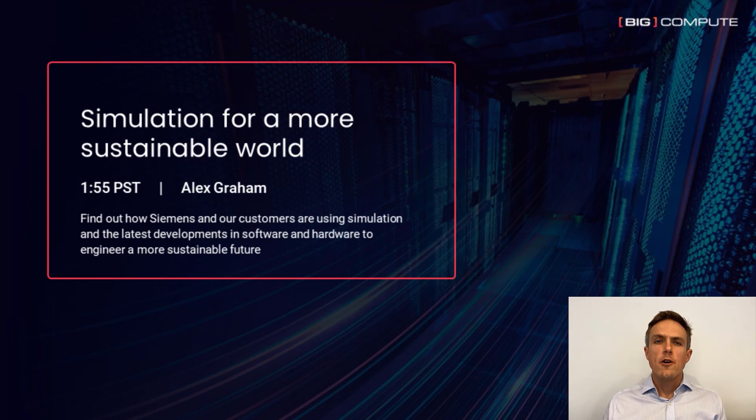Hello and welcome. I'd like to start off by taking you back just over 300 years to when Thomas Savery invented the first machine that could reliably, perhaps not very efficiently, convert the energy stored in fossil fuels into useful kinetic energy. This device heralded the start of the first industrial revolution, and in the beginning it could only convert about 1% of the available energy into useful motive power.

Since then we've come a very long way. All of the refinements and developments that followed from this initial invention have given rise to one of the biggest transformations in the quality of life that our species has ever seen.

It also led to a rapid rise in population and a huge demand for cheap energy. Today the population of the world is around 8 billion, and the UN predicts that by 2056 that number will be 10 billion. Cheap energy is critical to improving and developing quality of life the world over.

So we all know there's a huge challenge ahead of us as a species. We need new technologies, breakthroughs, a lot of innovation. But also the way we value and use energy needs to change, and a big part of that is making sure that the energy we do use is used as purposely and efficiently as possible. That's what I'd like to talk to you about today.

My name is Alex Graham from Siemens Digital Industry Software. Over the past 10 years or so, I've been working with lots of our simulation products and our customers across a whole range of industries and applications. Today, I'm excited to share with you some examples of what Siemens and our customers have been doing to improve the way that we work and improve the way that we consume energy today.

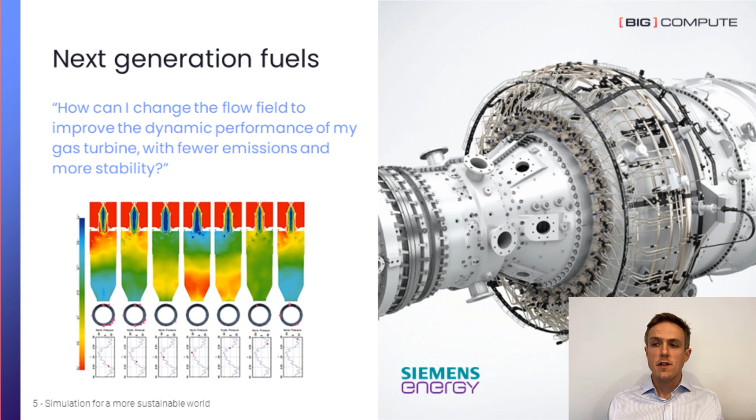They went on to comment that actually the thing that's been holding them back is computational power, and it's only over the last 2 to 5 years that this has really been possible. Luckily, there are some big leaps being made in solver and HPC technology, and we'll get onto that later.

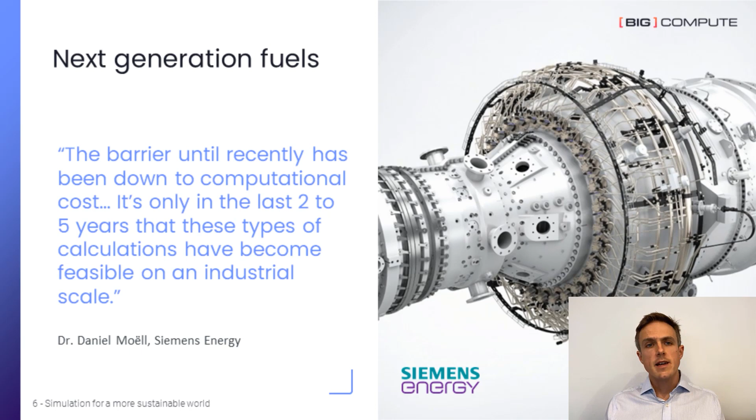The next example is all about getting that extra few percent of performance out of an existing design using the latest simulation and generative design techniques. EDAG, one of our customers in the automotive industry, was working on an electric vehicle battery pack cooling circuit. They worked with us to optimize this component - a flow splitter and return line packed very closely together, circled on the slide. The packaging constraints really limit what this device could possibly look like.

But still, using a simulation-driven design approach, we were able to make significant gains: almost 50% change in pressure drop and a 7% improvement in mass flow rate through the cooling channels. That equates to an improvement in cooling efficiency and an energy saving in terms of the effort needed to push the fluid through the system.

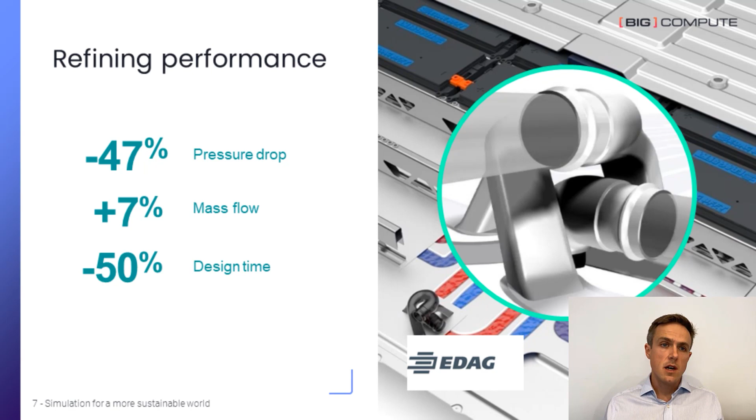Meanwhile, the design time actually falls because you don't need to design, test, refine and go through that cycle. We go directly to a design which satisfies the needs of the flow itself. This is shown nicely in this video.

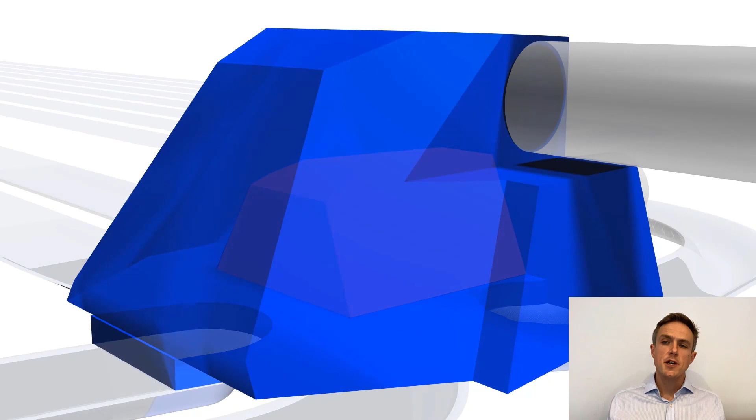As we zoom in on the component, what we see is a design that was created by a human, which is pretty good. Then we see a bounding box placed on that geometry - that's the packaging constraint. Then the algorithm simply removes any material that's not helping it achieve its target, and we naturally end up with quite an organic shape.

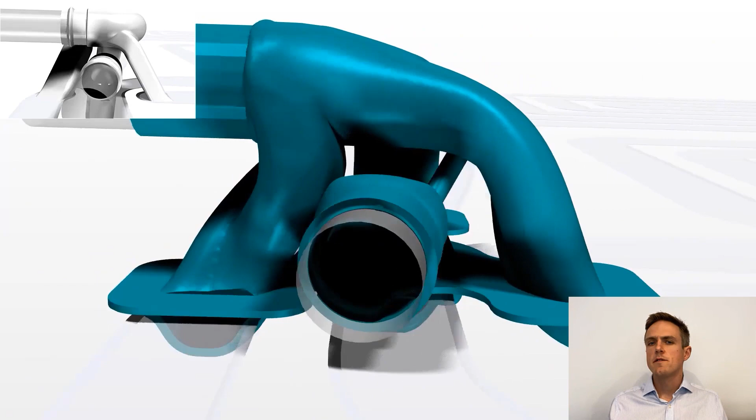As you can see, it's not far off what the original designer came up with - it's almost as if the pipes have been joined in a different order. But this is the way the flow prefers to go, and it results in a more efficient design. It's a great example of how simulation is now enabling us to push the design of even a simple component and find more of these small efficiency gains, which all add up.

The really interesting and exciting use cases for simulation all have one thing in common: they're all possible due to the relatively huge computational resources we now have access to. And yes, that compute is expensive, both in monetary terms and environmental impact. So we need to figure out ways to reduce that environmental impact, even as the compute itself is used to solve some of the big challenges facing us, make breakthroughs, and improve energy efficiency of the products.

Other things we can do to reduce the environmental impact of simulation are to improve solver technology and to improve HPC technology. We'll take a look at both of those things as well.

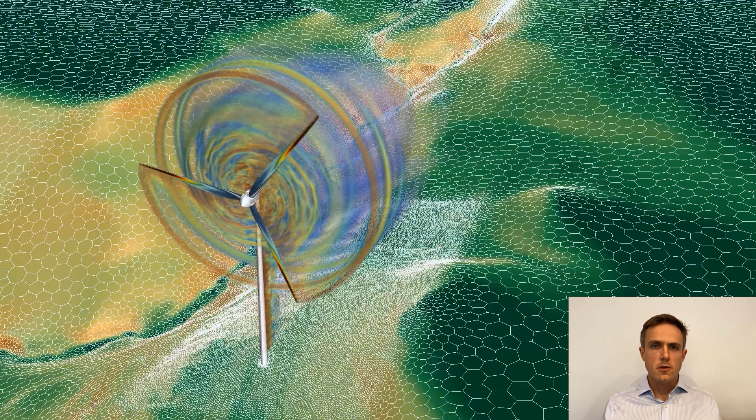Under the hood, it's a lot of number crunching. The volume containing the fluid has to be split into millions or billions of cells, and with each cell being directly connected to a number of neighbors as well as indirectly connected to the whole of the rest of the model, the solver has to work very gradually towards a solution where all of the cells and all of the flow is in equilibrium. It's even more complex in a simulation like this, where we're looking for the transient behavior of the flow. So that also has to be done at a number of points in time to build up a picture of how things change.

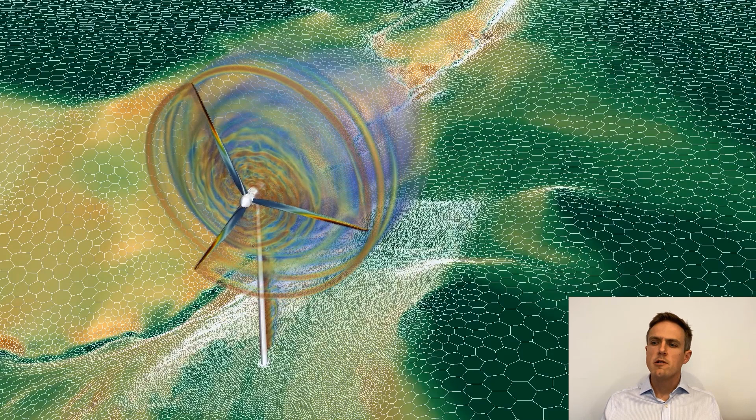So the mesh is actually what you see in the example on the screen right now. So if you imagine that whole volume is filled with a sort of honeycomb type structure, it can be honeycomb, it can be a sort of grid. But the mesh is not usually shown in a video like this, otherwise you wouldn't be able to see what the flow was doing. So what you're actually seeing there is the imprint of the mesh on the surface of the landscape where the wind turbine sits.

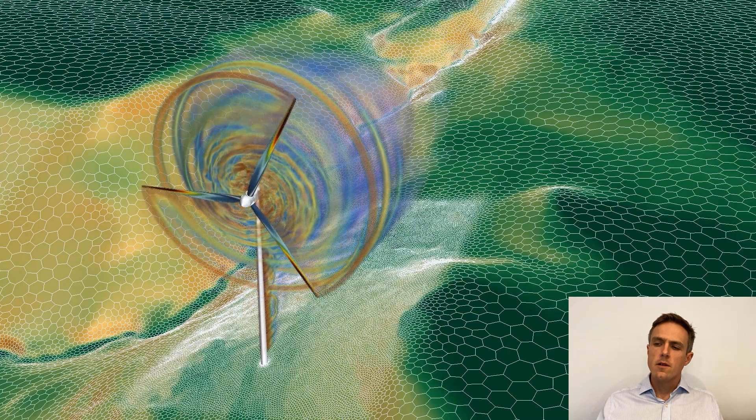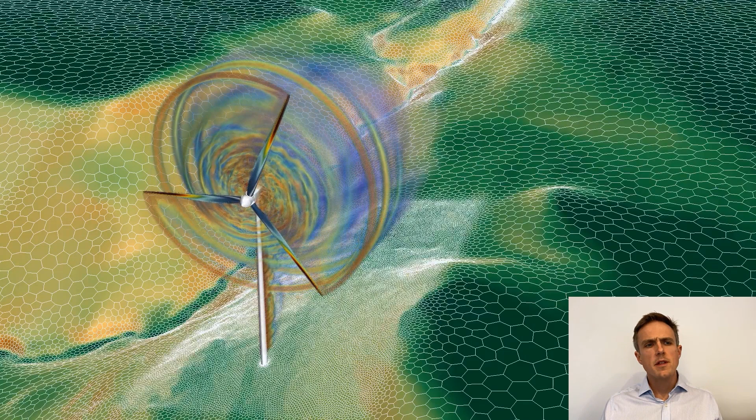But what you can see is that the resolution of the mesh is definitely changing there. So it's quite coarse on the outside, far away from the turbine, but then it's very fine where the turbine is. And that's just like pixels on a TV. So far away from the turbine, we're looking at like a dot matrix display, and close to the turbine, we're looking at sort of 4K resolution, because we want to be able to resolve what the flow is doing. So we need to have lots and lots of data points to do that. So in this case, you can see that the mesh has been refined close to the turbine in a fairly manual way. But this is actually something that we can change to make a big improvement in efficiency.

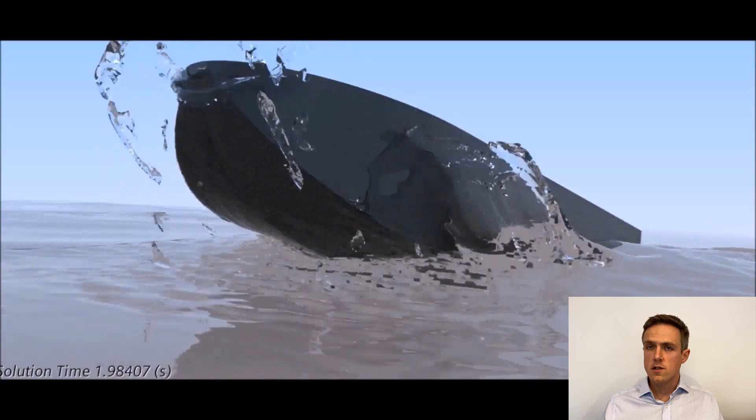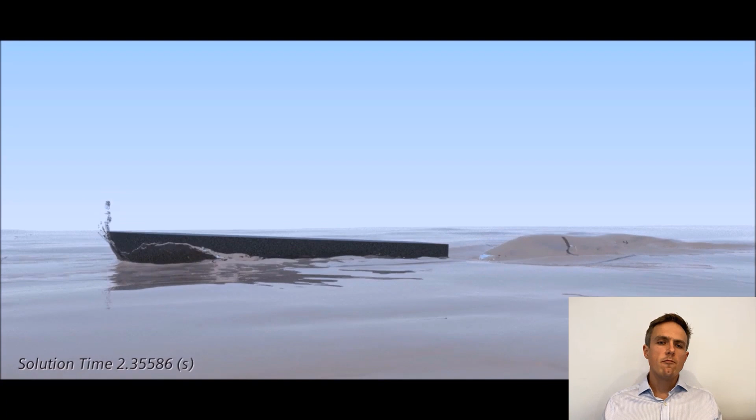So in this example, you're seeing a planing hull moving through waves. And in this model, the water flow and the air are both included in the simulation. And of course, there's a sharp interface between those two, which is the water surface. So the difficulty is that because the boat's moving through the waves, it's dipping up and down and the water's splashing and breaking up into droplets. We don't really know where it's going to be. And so to refine the mesh enough to be able to capture the water surface in all cases would inevitably be quite inefficient.

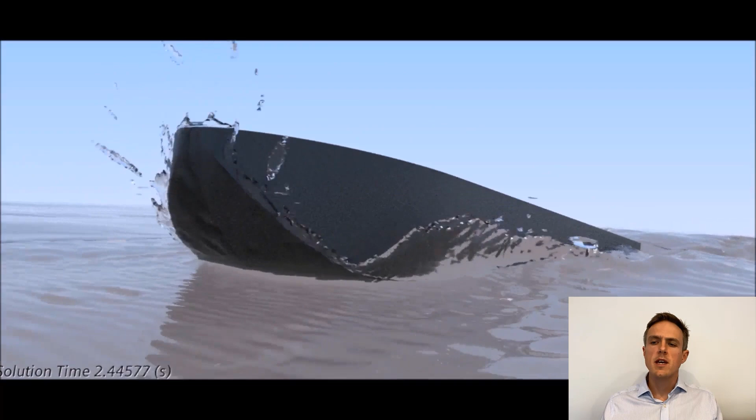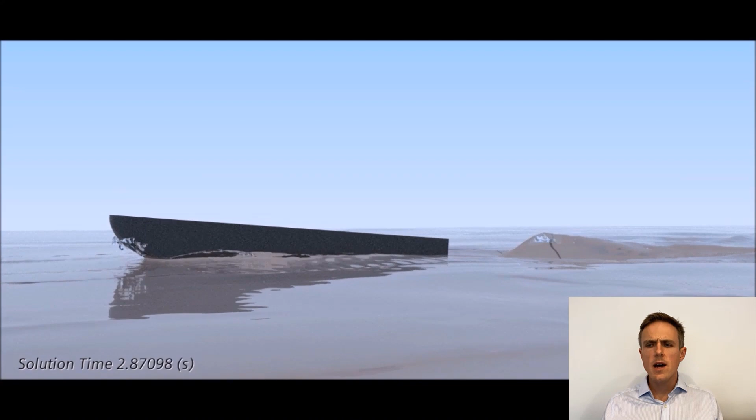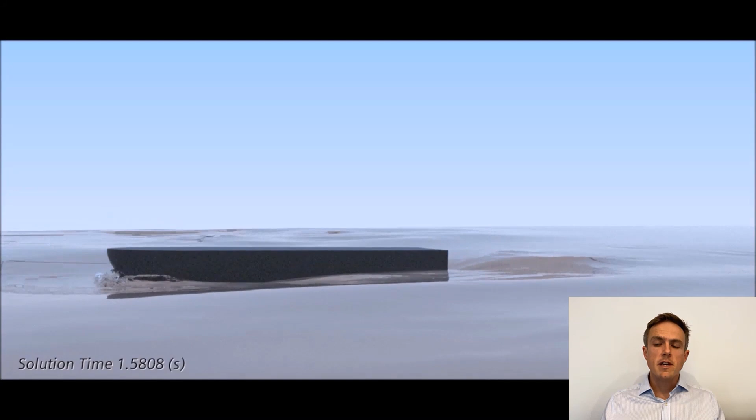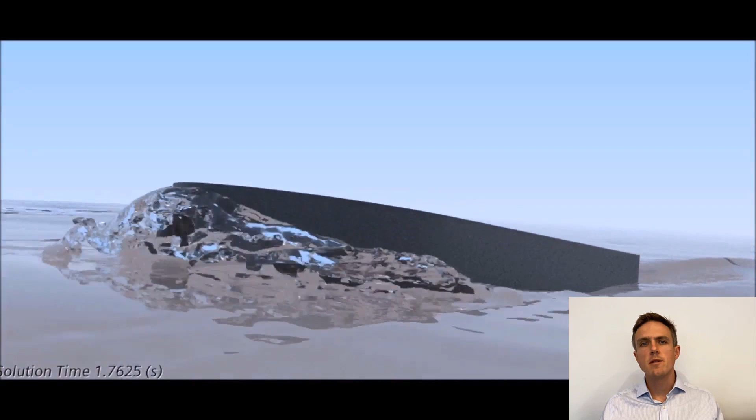So what we see happening here is an adaptive algorithm which is automatically refining the mesh where the water surface is. So it's adding and removing cells all the time. And this means that you can then run the model much, much faster, or you can run it in more detail at the same time. In this particular case, this is an industry standard benchmark case, and this actually gave a speed up of nearly 3 times just by implementing a different meshing algorithm. So adaptive mesh refinement is just one example of simulation technology which can really improve efficiency, let you do more and consume less power in the process.

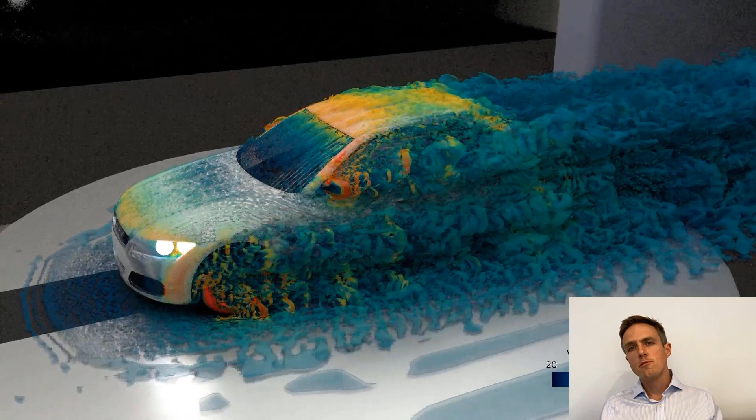So car aerodynamics is a field of ever-growing relevance as electrification continues to transform the industry. And aerodynamics is especially relevant for electric vehicles for 2 reasons. So the first is the obvious one. If you can improve the aerodynamic drag, then you can get more range from your battery. The second is that without the masking soundtrack of the engine, the occupants of the car are now going to start hearing much more noise from things like the side mirrors, the sunroofs, the HVAC systems, and the external aerodynamics.

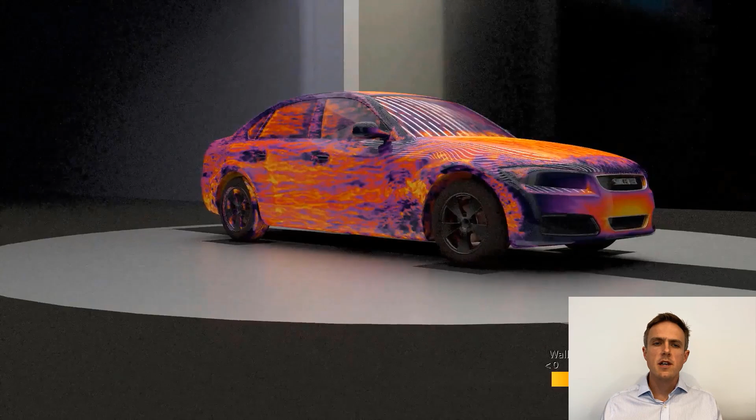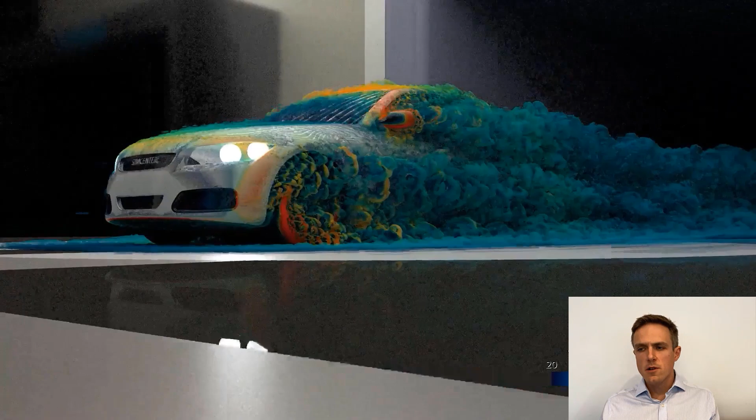And that's why simulations like the one you see here are becoming increasingly common. So what we're looking at here is a simulation of the unsteady airflow around a car using the large eddy simulation turbulence modeling technique. And by the unsteady flow, we're talking about resolving all of those little fluctuations and eddies that are produced by the flow as it passes over things like the windscreen wipers and the side mirrors.

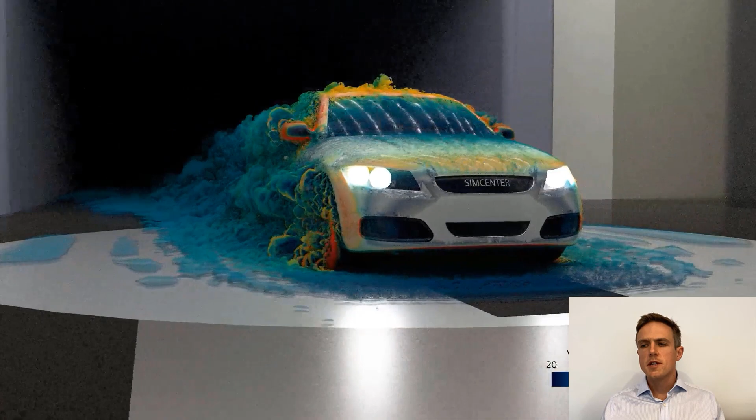And if you cast your mind back to the computational mesh that we were talking about just a few minutes ago, you can probably imagine that a simulation like this is incredibly expensive to do. What's more is the solver would also have to be using very small time steps to follow that evolution. But the interesting part is that we've recently been able to achieve phenomenal speedups on this kind of simulation by running the solver on GPU hardware.

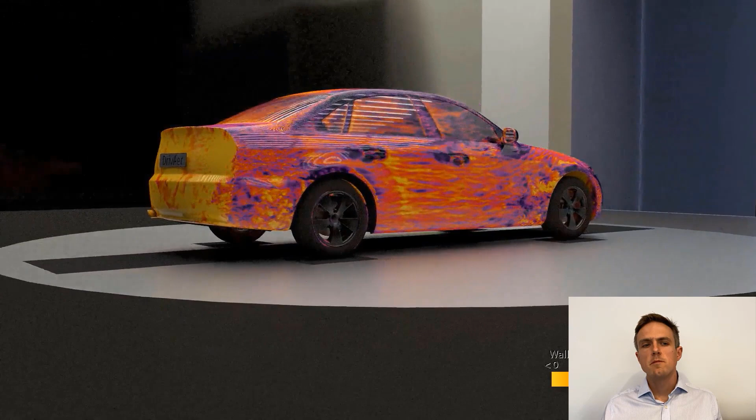So take a look at these numbers. This chart shows the speedup achieved on a benchmark case following the industry best practices from the third Automotive CFD Prediction Workshop. So the mesh contained 130 million cells and was run for 16,000 time steps, and that equates to about 4 seconds of real time.

So running that simulation on 10 HPC nodes, so that's 400 CPUs, resulted in a wall clock time of about 60 hours. Moving it to one node containing 8 NVIDIA GPUs meant that it took about 20 hours, and then using 2 nodes brought that down even further to 12 hours. And that's a phenomenal saving for a very, very high fidelity simulation like that.

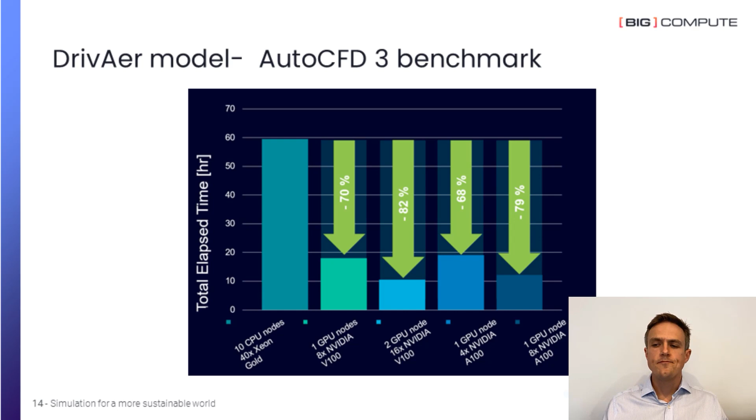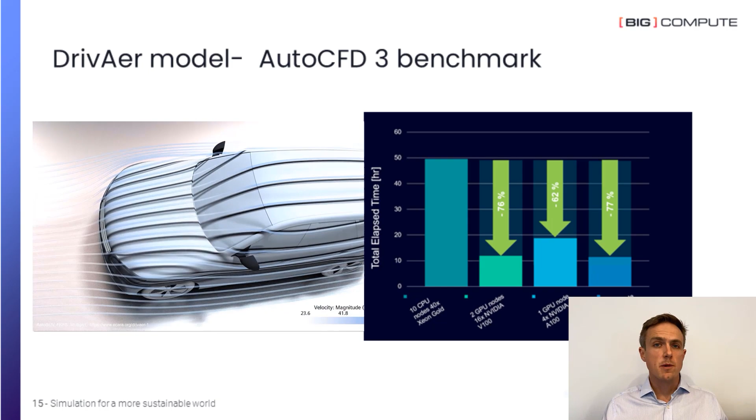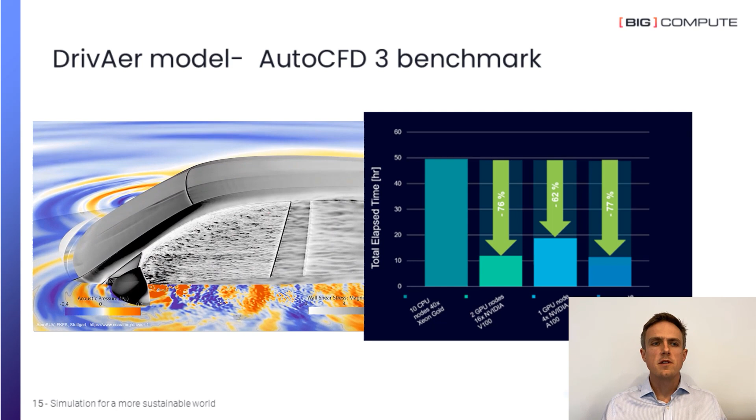GPUs can also make a big difference to aeroacoustic simulations, so these very computationally intense calculations are really critical to understanding how noise can be produced from components like wing mirrors and sunroofs, and how that can contribute to the sound which is actually heard inside the cabin by the occupants. So the speedup here is similarly impressive, and this is using an acoustic wave model that's also recently been ported to run on GPUs in the latest release of Simcenter STAR-CCM+.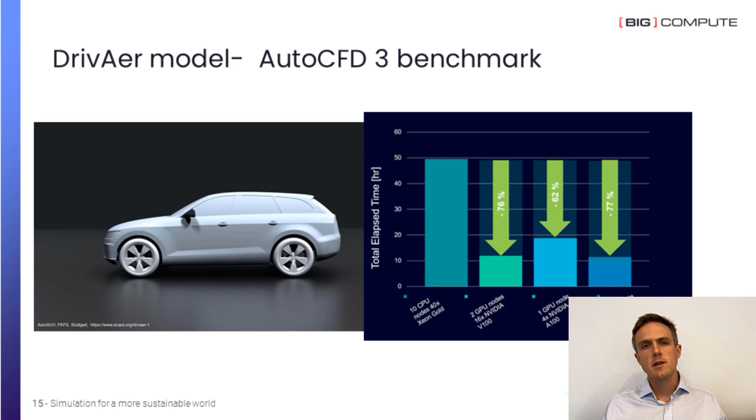Now the disclaimer here is that GPUs don't really work for every single type of CFD problem. So depending on the case and crucially what kind of physics you're modeling, they may or may not be suitable. So CPUs may still be the way to go. But we're actually seeing really great steps being taken there too, which would benefit CFD workloads. So for example, the recent AMD Milan-X series, which can produce beyond linear scaling due to the ultra efficient cache, which is something that we never really would have thought possible. And there's more too in the pipeline.

We've been working closely with NVIDIA on the Grace ARM CPUs, and I'm really excited to see the results of that work. We're also going to see much more focus on attributing carbon footprint to simulation activities, something which has generally escaped much scrutiny in the past and we're seeing increasing customer demand for.

So in today's world, the hardware that you're using is more important than ever, and this is something that we seek to address by constantly working with hardware and cloud providers to benchmark our solutions and understand how to leverage these new developments.

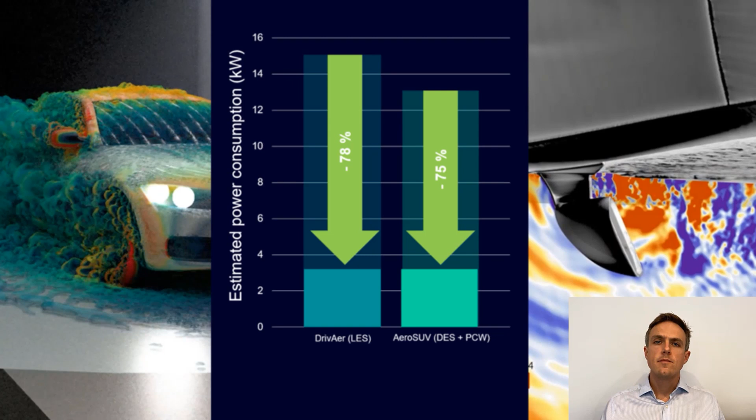All of these developments together are massive, and they really transform the value proposition of big compute today. So in contrast to the rather dreary image of the Industrial Revolution that I started this talk with, I'd like to finish with this more cheery view of a sustainable world that we can build today with simulation and test. There's a lot of work to be done, and one thing is for sure, that simulation, test and big compute are going to be a huge part of it.